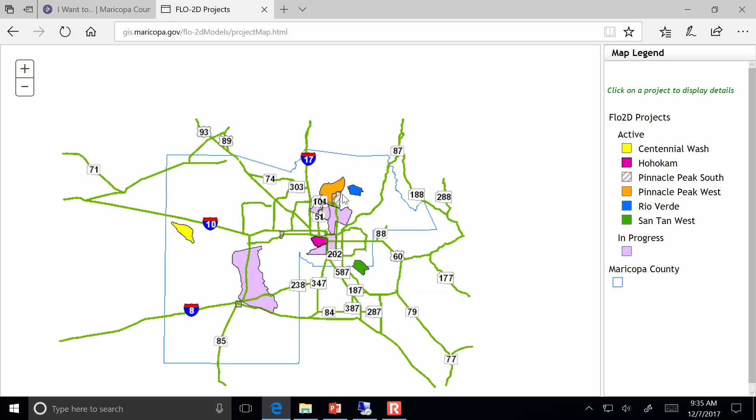But before we do that, just this morning I got the password so that we could take a look at the Flo2D results that Maricopa County has got on their website. And so let's launch the viewer, and it's pretty interesting. We'll be exploring this together. Since I just got the password about 30 minutes ago, I haven't had a chance to really get to the bottom of all the capabilities. And I saw it on Friday, so I've seen it.

But let's have a look. As I mentioned last time, one of the astonishing things that they do is they contract with surveyors who have drones, and they'll fly an area using LiDAR, which is a technology that can produce really high resolution elevation data, and they take their own aerial photography to have pictures in the background available.

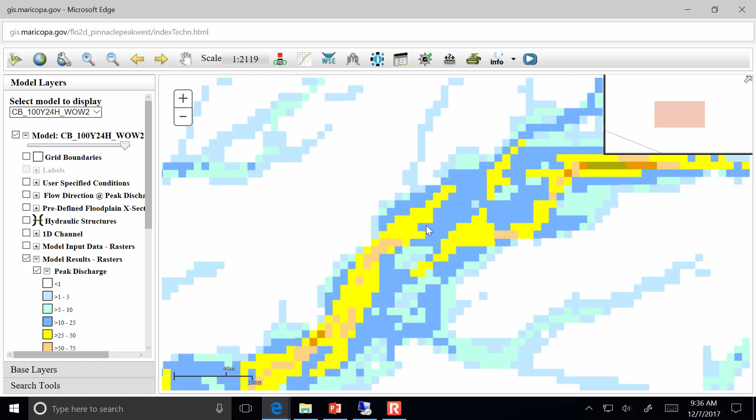So here right now it looks like we've got the 100-year 24-hour storm set, and if we zoom in on this area, you can see what the depths are going to be under the peak discharge. And so I imagine that as we zoom in, it's maybe going to improve the quality of that raster, and we might be able to turn on some base layers that include where the roads are, and we could switch on some of the images too, to help us see where the houses are. There we go.

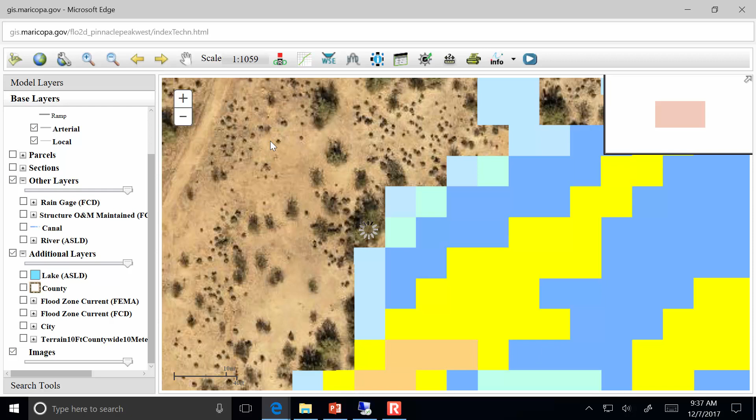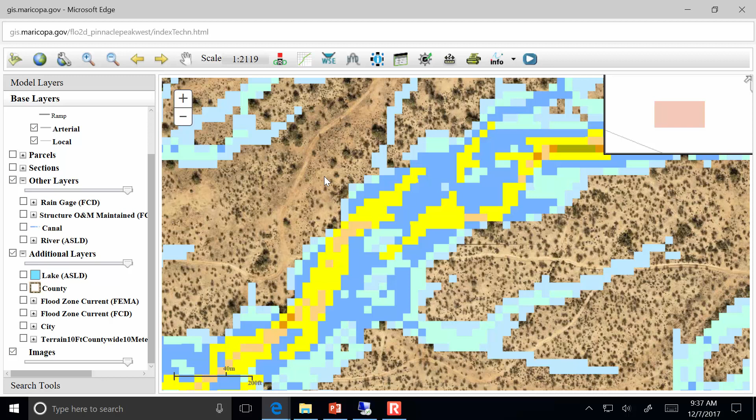All right, so this is really high resolution stuff. I mean, you're seeing where individual trees and bushes are, and so with this map you could find out if a tree that you're going to be planting is at risk of being washed away by the 100-year storm. And now obviously they're not doing it because they're worried about trees, they're worried about high-value real estate.

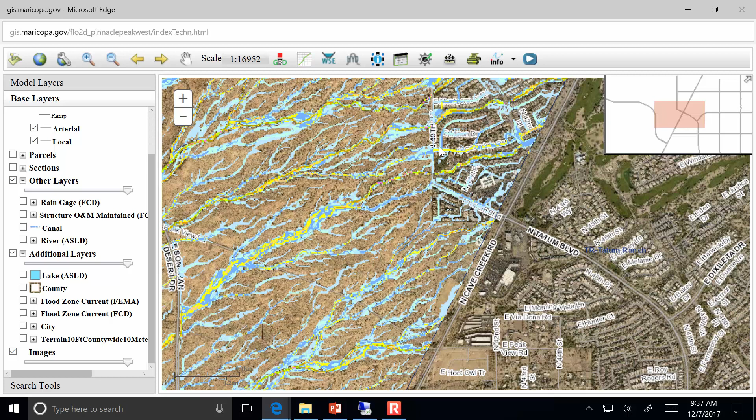And so here is a neighborhood, and the cool thing about this model, as it was described to me last weekend, is that you can do both rural areas and urban areas together, and there's kind of a seamless transition between the two. And the HEC1 models that we've been setting up using WMS, the strength of that is principally for rural areas or for undeveloped parts.

You can put together a HEC1 model for a developed area, but you'd need to have it be exclusively developed. Blending the two in one model, having both a developed portion and an undeveloped portion, really doesn't work together that great. And so what we did in this class for urban watersheds was I showed you very briefly how to use Bentley StormCAD.

And so remember, StormCAD is where you're setting up inlets and sizing the pipes using the rational method, and you defined catchments, and there's some more sophisticated functionality there where you can also create curb and gutter networks, so you could see how deep the water is in the curb alongside the road, and so it's got the open channel leading to the inlet and then water flowing through the pipe. But here, rather than having your urban being one model and your rural being another, it's seamlessly integrated together.

And so they have to sometimes go in and add break lines so that, maybe the elevation data would have had the flow going in a different direction, but they know that here's the road and the curbs are going to be directing the flow along that street towards certain inlets, or, as short as this road may be, it's possible that there isn't a separate storm sewer, but rather they just have the curbs that discharge directly to an existing gully, kind of an idea.

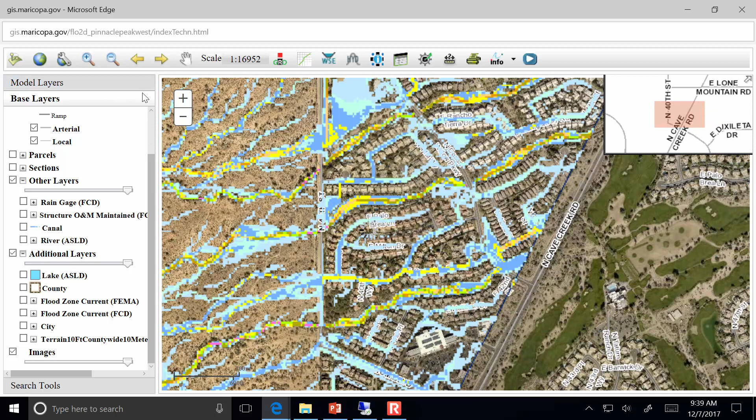And so I'm going to have to play with this more over the coming days rather than grade your exams and all that sort of thing.

But we can switch it over to, I guess it's mostly the 100-year model. I thought that they had other return period storms besides that, but that's probably the sort of thing that I have to check. Okay, so this is how transparent it is, in case you don't want it to overtake some of the other things you're looking at.

And the images can also be made transparent. Pretty cool. So this is separate from the FEMA 100-year flood maps. You know, the 100-year flood maps that FEMA does are just sort of you're in or you're out of the floodplain. This is showing you precisely where the water's going to be and what the depth of the water is going to be. So FEMA is kind of a binary thing: floodplain, no floodplain.

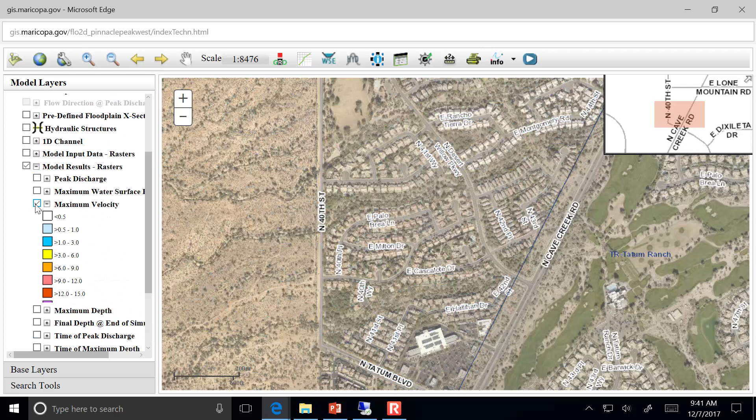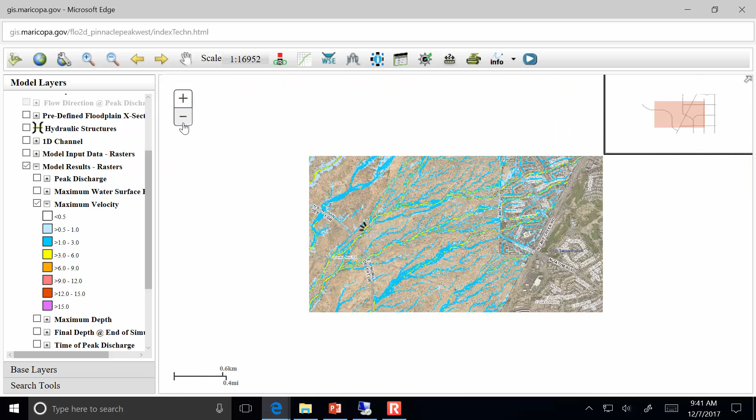Let's switch on some of this other stuff to see what we can see. Velocities, so that you have an idea of what the scour might be. So it looks like relatively low velocities through this neighborhood, and as we get further into the network where you have a lot more accumulation, then of course the scour velocities are going to increase, and that's also taking into account the slope of the channel. So I guess the warmer colors are indicating faster moving flow, and so this region with the faster velocities is going to have some scour potential.

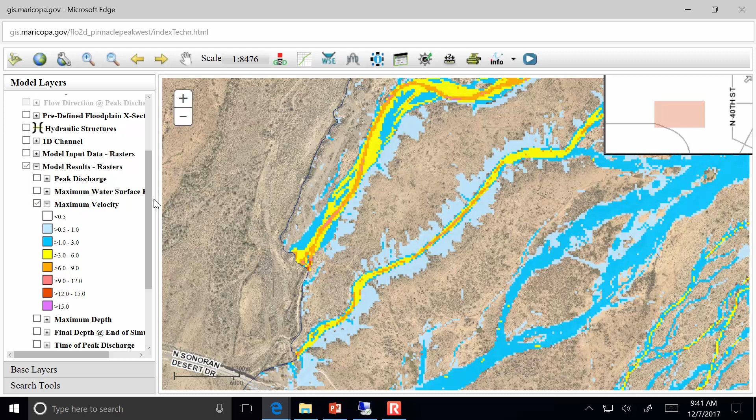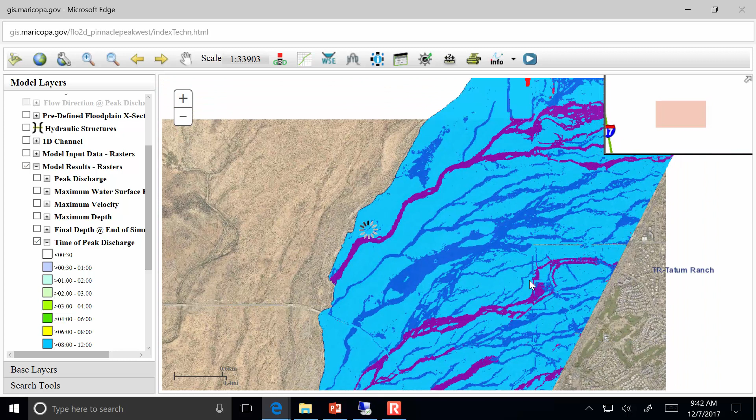And so if you were putting in a culvert, or if you're building a bridge and you're thinking about the foundation of the bridge structure, then scour is going to be a risk at these locations where there's a higher maximum velocity. So that's pretty interesting stuff. So I'm just exploring this for the first time, and time of peak discharge, I think, is pretty interesting, because I guess this time of peak discharge is telling you how long you've got until the flow arrives at a certain location.

And that's significant because they have a couple of locations where every year they're putting in 2 more signs that can be remotely activated, or in some cases it detects flow in a stream, because they don't have culverts and bridges over every crossing. Sometimes the road just goes down and then it'll be momentarily flooded during a peak event and people just have to not drive across that road. But if it's at night, you can't really see how deep the water is, and sometimes people aren't paying attention, so they have flashing signals.

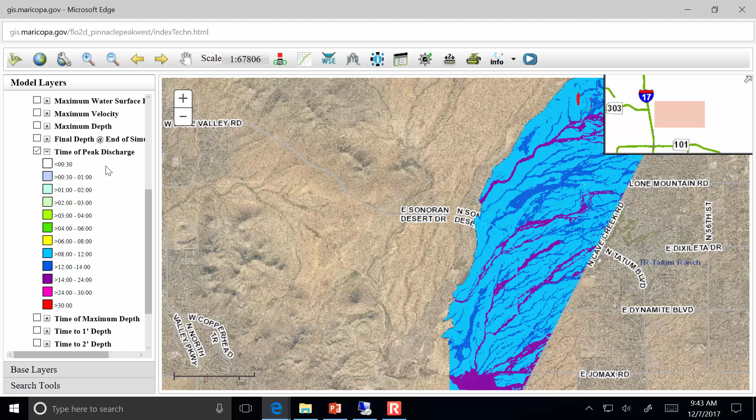And so this time of peak discharge is a useful bit of information, because it tells you how much lead time you've got from when it begins to rain to when that flow may be going through a crossing, and how reactive you've got to be before you activate a signal and the flow actually could be there. This model is amazing, and it's just light years beyond the capacities of HEC 1, so I think I've got my work cut out for me. I need to start adapting these same kind of models for West Virginia and learn more about Flo2D. It's not anything that I've used before, but they convinced me it's the wave of the future, and it's really a cool resource that they've put online.

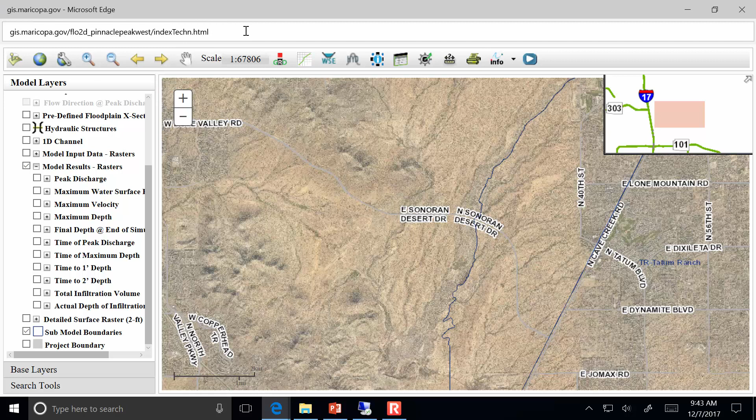If any of you are interested in having access to the system, just to show to other people or maybe to look for yourself, then I can put you in touch with the people who can generate the passwords, because each user is supposed to have their own password for accessing the site.

Well, high-resolution elevation mapping is one of the most important things. And then another thing that they showed me while I was there is that they have really detailed soil information as well. A really clear understanding of the soil that's in the watershed, particularly because in these areas they lose a lot of water during a storm. It's called transmission losses, where the water is infiltrating down into the channel. I think the transmission losses are probably less of an issue here in West Virginia, but the point is that you need high-resolution elevation data, high-resolution soil type data.

And I don't know that we have that same really detailed understanding of the soil properties on a wide-scale basis like they do across their county. I mean, they've commissioned some really exhaustive studies, and you think sand is sand, gravel is gravel, but it turns out that it's a lot more sophisticated than that.

But I mean, there's a lot I still need to learn, so I would imagine that next year's version of hydrology is going to hopefully include a little bit of Flo2D, but I still have to iron out all the licensing issues and see if it's the sort of thing where in a lecture or two you can put something together meaningfully.

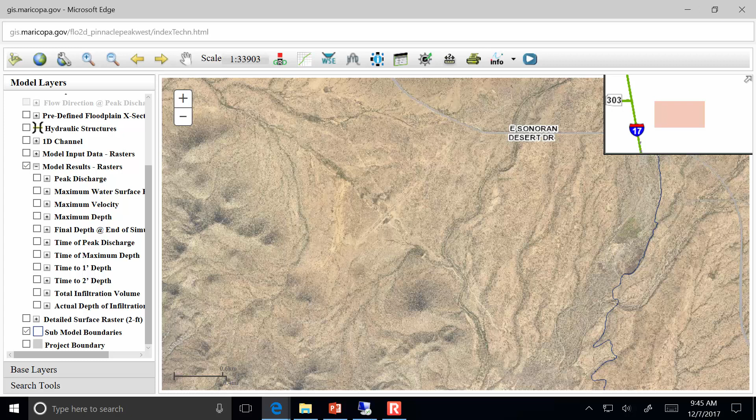All right, so the bulk of what we're going to be doing today is talking about groundwater. Groundwater hydrology includes how much water there is under the earth, different aspects of its quality, and that can include contamination from surface sources, like unintentional spills, or through the 40s and 50s, unfortunately, there were a lot of places where hazardous chemicals were land applied, and things like dry cleaning fluid or explosive residues were just dumped into trenches, and then the trenches were covered with soil, and over time that contamination seeped down into the water.

So that's one aspect of quality, but another one that's really important is the infiltration of saline groundwater into previously freshwater aquifers. And that happens a lot in coastal areas and in inland areas as well, where there are brackish waters that, because you're pumping fresh water, start to intrude in areas that previously were freshwater. Trying to figure out where the water is and how it moves through the soil. So all of these concerns are addressed by the field of groundwater hydrology.

And a big component of being able to predict these things is putting together models of where the water is and how it moves. And so just like there's WMS for surface water hydrology, the Aquaveo people put together a program called GMS that's for groundwater flow. And it uses some of the principles we're going to be talking about today.

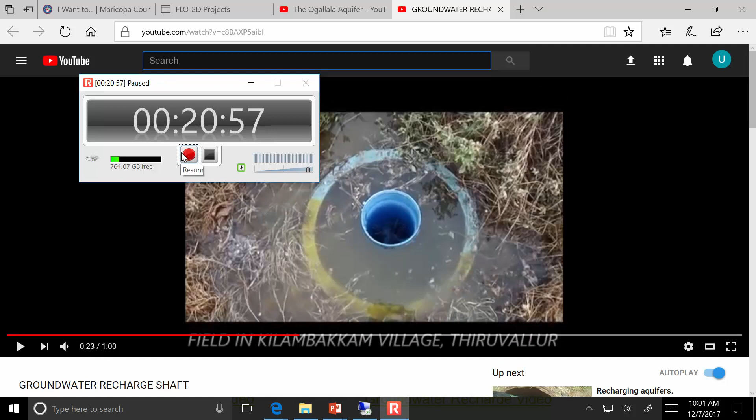I don't know how they expect us to study with the Christmas carols chiming in the background. It's a little distracting, right?

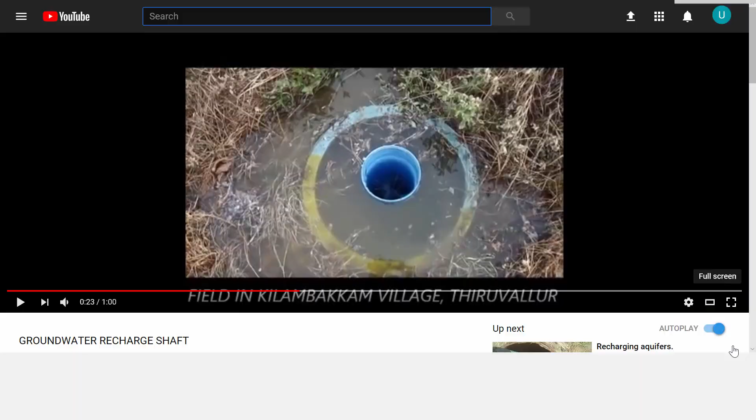All right, well, let's break this down. Someone drilled a hole in a field, and they put a pipe, like a well casing, and water is trickling into the hole. So did you understand what's the point of this hole that they drilled? What are they trying to encourage? Groundwater infiltration. They're trying to take the water from this pond and get it down underground where actually it could be stored. Because when it's in this pond, remember, it's subject to evaporation.

This is a prime breeding ground for mosquitoes. And India is now a Zika country, especially in the south. Tamil Nadu is in the south of India. And so this is a health risk, and it's a lost resource if that water evaporates. And so just drilling a hole and encouraging the runoff from that field to go down underground is a great idea.

And part of the purpose of this casing is, I would imagine, we can't see, but I would imagine it's slotted, it's like a mesh at the bottom to try and filter out any rocks or contamination that maybe would get down into and plug the holes as the water gets in.

So this may require some occasional maintenance. Another thing that's relevant about this is in this field, the runoff from the surrounding land is all going to this pool area here, and it's going to bring fine sediments with it. And so those fine sediments are going to be clogging the soil pores at the surface. And so there probably isn't good surface infiltration down into the ground because over the long term, the sediments have clogged that.

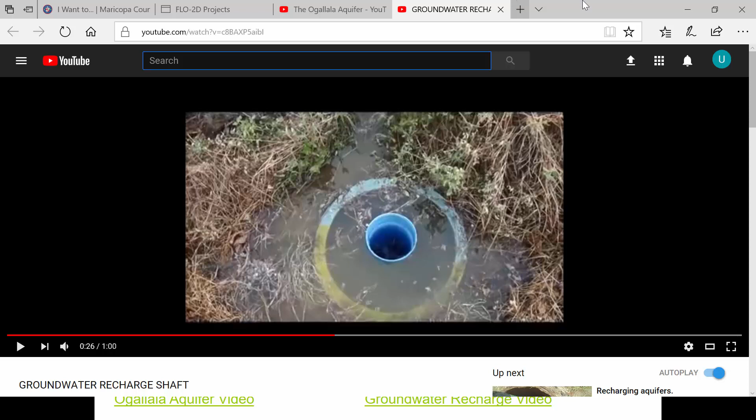And so hopefully, if this is a stratified aquifer, meaning that there are different depths at which water exists, and maybe they're confined by layers of really low hydraulic conductivity, maybe the drinking water well goes down 100 meters, and this is just going to more of a surface aquifer, and they're separated by a couple of layers of clay that would be reducing the rate of movement until bacteria in the soil could remove any microbial contamination, and hopefully there's no chemical pollution, although in Tamil Nadu there probably is a lot of pesticide use there.

All right, so those were interesting videos, and they kind of set the stage for part of what we're going to be talking about today. Here's a cross-sectional view, and this is what I was just talking about, where you can have multiple aquifer layers, and so this kind of helps us to understand some of the important terminology. An aquifer is just where the voids are saturated with water. And so there can be water in the soil above the water table in the form of soil moisture. But when all of the voids are completely saturated with water, what that means is that we could extract the water out.

Now, an aquiclude is where water is present but can't be easily extracted because of a low hydraulic conductivity. And so this cross-sectional impervious layer is meant to represent like a clay formation. And the confined aquifer has a confining layer above and below it. And the reason why it's pressurized, you can see from this well casing where the water is actually coming out without even having any kind of a pump. So that's showing that at C, the aquifer is pressurized, is because the water table is perched.

If you look over here, we've got rain onto a hillside that's elevated, and there's enough of the water over here that this is the free surface of water. Here's the water table, and we're going down. The pressure is increasing to the point of where through the soil there are some losses in pressure. You can see here the water table height is higher than it is there. And that tells us that the movement of the water is going to be from where the water is high to where the water is low. So it's moving from A towards B, towards C.

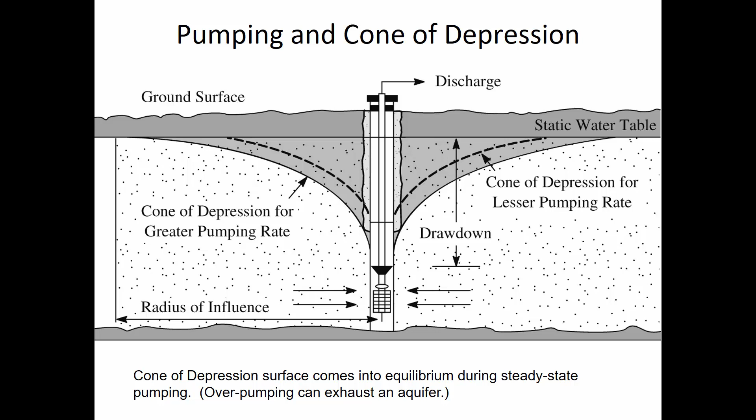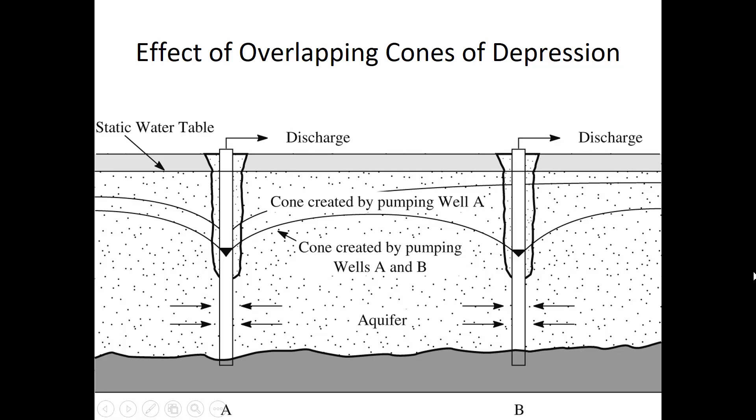All right, so a fully penetrating well would be a well where the casing is all the way through the depth of the aquifer. Let's go back to a picture really quickly. None of these wells are fully penetrating through the confined aquifer. If they were fully penetrating, then the well casing would go all the way down to the bottom, and they would be screened through the entire depth of the aquifer, meaning that water doesn't have to flow through just some of the depth, but can flow through all of the depth towards that central location.

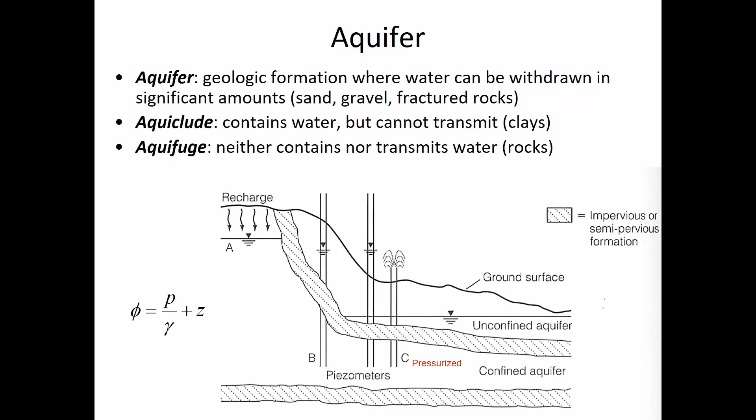So if we go back now to the terminology, fully penetrating means all the way to the bottom. Screen depth: the screen is these slots in the drain, or sometimes a physical wire mesh, to try and keep the soil and rocks from going into the central location, where really all you want is the water. And the well radius is the radius of the physical pipe itself. That's one of the parameters that we're going to put into the formulas that tell us how much water you can get out of a well for a certain drawdown.

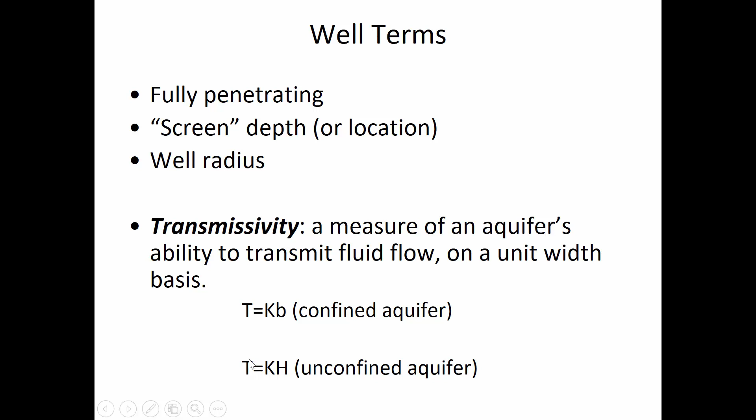Now you all know about hydraulic conductivity. There's a closely related term that takes into account how thick the aquifer is, and that's transmissivity. For a confined aquifer, we would have the height of the aquifer B multiplied by the hydraulic conductivity to get the transmissivity. But in an unconfined aquifer, we'd just use H, which is the depth of the water from the bottom of the confining layer up to the water height itself. So H is basically just how deep the water is inside the unconfined aquifer.

Okay, so hydraulic conductivity has units of length per time, whether it's centimeters per second or meters per day. It's a measurement of how easily water flows through the soil, and it's affected not only by the void size, but also by how attracted the material is to water. Part of the reason why clay has such a low hydraulic conductivity is because of the negative charge of clay particles. So there's an attraction between the negative charge on the clay particles and the positive charge that exists in a hydrogen.

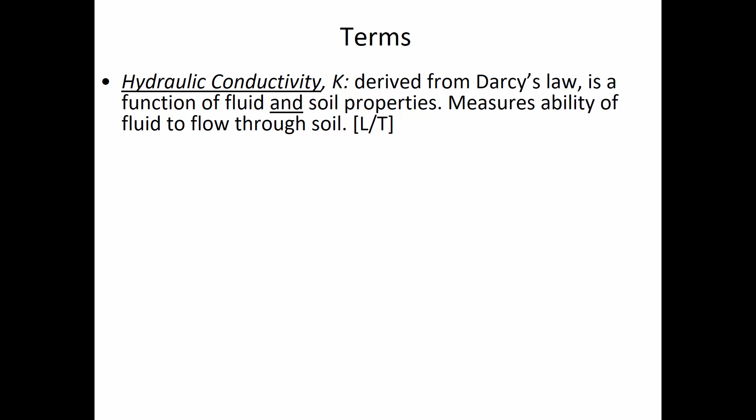In a water molecule, H2O, we know that the electrons go towards the oxygen, and so it's a polar water molecule, and that sort of accounts for the slow movement of water through the clay soil. Aquifer thickness, B.

Transmissivity. Piezometric head is pressure divided by gamma plus elevation. And piezometric head is going to tell us how much energy is available to drive the water towards the well casing.

And then one last term that we haven't talked about today, but we have in the past, is the effective porosity. Of course, porosity is just a measure of the voids in a soil matrix relative to the overall volume. But some of those voids may not be interconnected, and so the effective porosity takes that into account, as well as some of the void is full of water that can't actually be removed because it's so closely bonded to the surface of the soil grains. And so effective porosity is accounting for both of those factors.

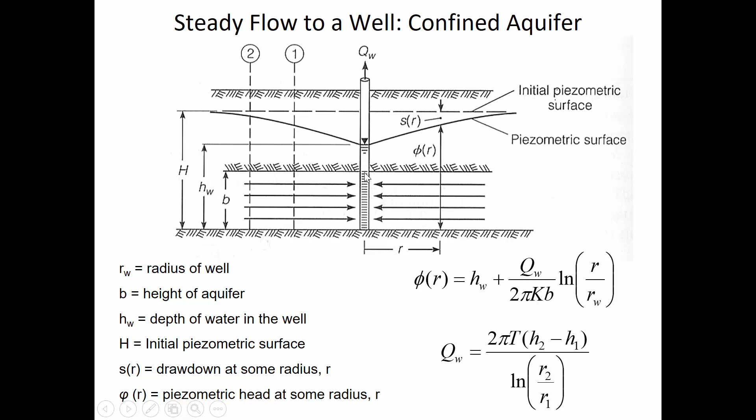For a confined aquifer, this is how it looks in the supplied reference manual for the FE exam. These are the equations that they've provided, and they call it the Theim equation. I guess I after E would be pronounced "theem" equation.

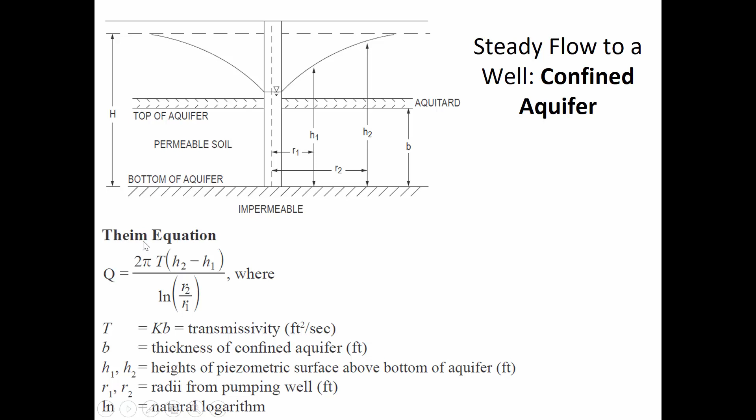Let's get some practice with that, just to dust out the cobwebs and get some practice crunching the numbers here. We've got a hydraulic conductivity of 20 meters per day. The thickness B of the aquifer is 6.6, and the initial piezometric surface is 14.53 meters above the lower confining layer. So that means that before pumping, capital H is 14.53 meters. So we want to know what's the Q that's going to cause the piezometric surface to be at 13.85. So you're going to have to use that as the h1 value.

And one thing I should point out is that we've been talking about the cone of depression, and a related term to cone of depression is drawdown. Drawdown is the distance between where the water is when pumping doesn't occur and where the water level is when pumping is going on. And so drawdown is the difference between those two.

Sometimes the distractors in the FE exam are trying to trick you into substituting drawdowns for the actual H values, which are supposed to go into the equation. So don't fall into the trap. Know the difference between the piezometric depth and the drawdown.

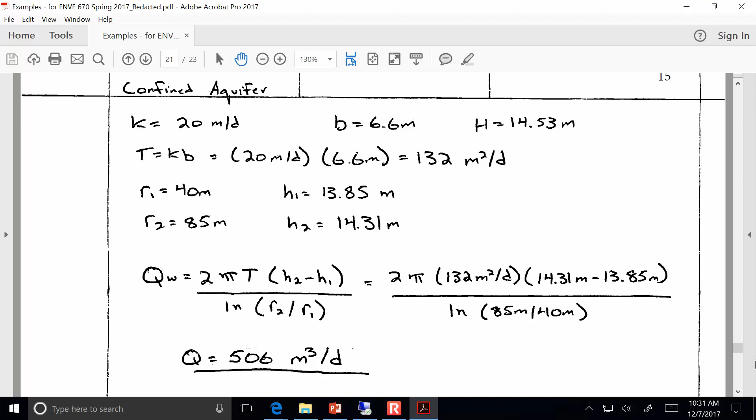Okay, for the second part, we want to find out what's the depth at the well under these conditions. So essentially, we're just going to be solving for H1 given an R1 of 0.25. The same flow rate, the same hydraulic conductivity. You need to pick a location too. So are you going to use the radius out to 85 meters or the 40-meter location?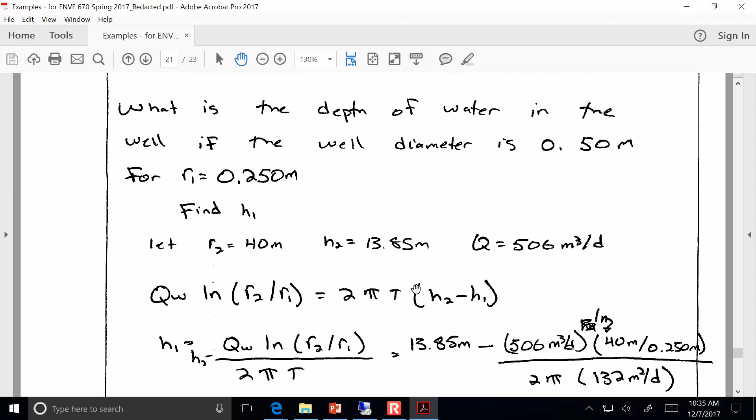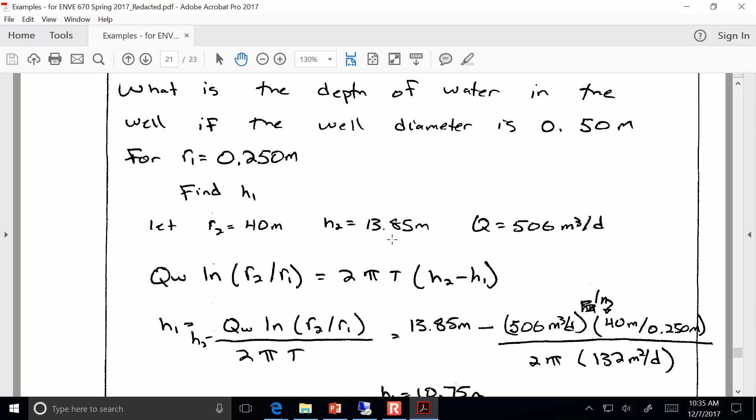In my solution, what I did was I said, okay, so R1 is going to be 0.25 because that's at the well itself. And I let the location 2 be the closer monitoring well, where we're keeping track of the water elevation 40 meters from our extraction well. And the height of the water at that monitoring well 40 meters away is 13.85 meters. And so for that same flow rate then, it tells us the depth at the well itself should be 10.75 meters. Anybody else get that same water depth?

All right, good. These problems are hard to write because you can create problems like this where the output number is impossible. So writing well problems is sometimes an iterative process to make sure that it works out and then it's not negative flow rates or negative water depths and things like that.

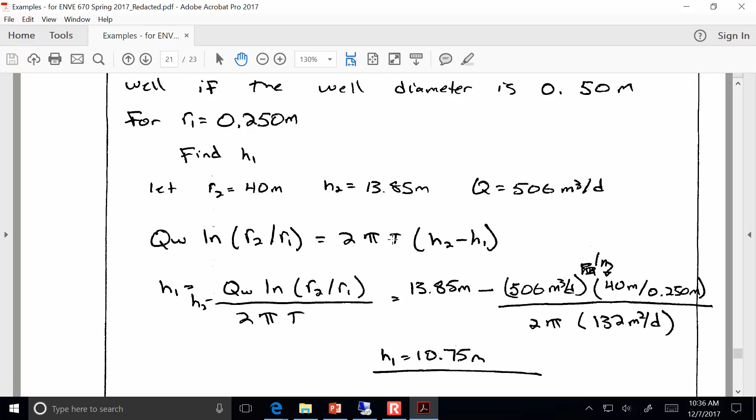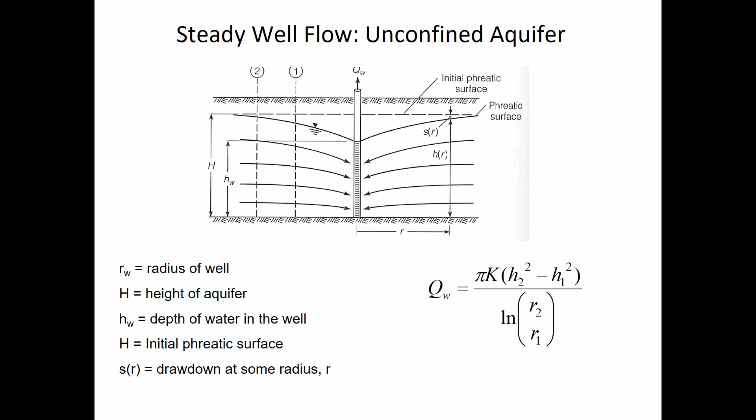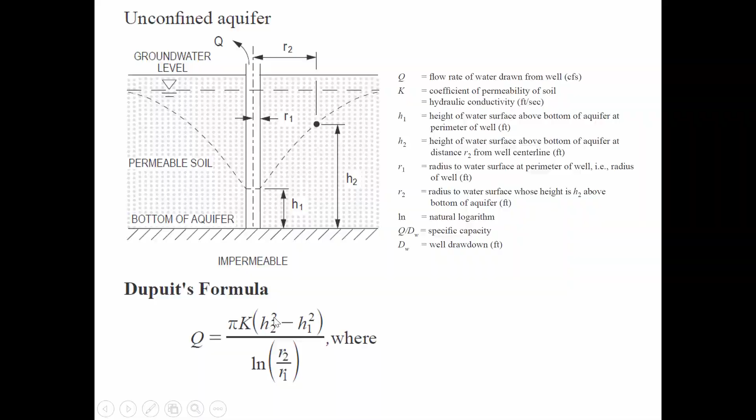All right, well, so that is a confined aquifer, which is the easy case. Things are just a little bit different for an unconfined aquifer. You have to square essentially the depth of water rather than it was just the depth of water in the case of a confined aquifer. Some texts, instead of squaring it, have you calculate like a modified or an effective height. If we look here in the FE reference manual, Dupuit's formula is squaring it. That's how they have it in the reference manual. And so let's take that formula and try it out here.

We have an unconfined aquifer where we are given the flow rate, 0.4 cubic meters per second is extracted from this unconfined aquifer. And the saturated thickness is 24 meters. So that's this depth H. That's how high the water level is before there's pumping. So now this is expressing the heights of the water in terms of drawdown. So 50 meters away, there's a meter of drawdown, which means then that the h is going to be 23 meters at that location. And 100 meters away, the drawdown is 0.5 meters. So you can use that, first of all, to calculate the hydraulic conductivity, and then in part B, I'd like you to calculate the drawdown 5 meters from the well.

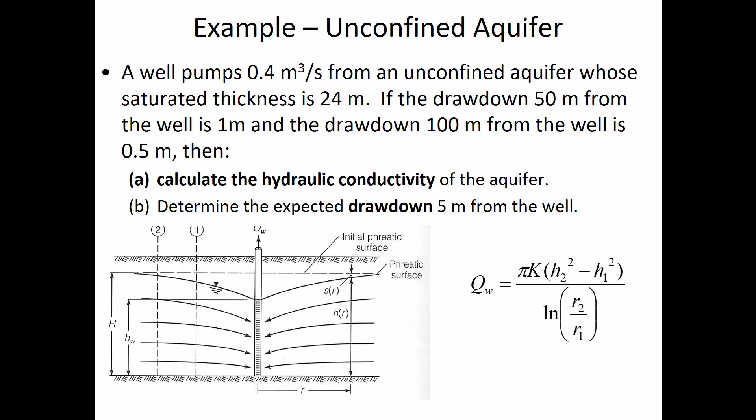Interpreting the problem statement is more than half the battle on these. I mean, just trying to figure out what it's asking and not confusing drawdown with head and that sort of thing. Okay, so this is showing the first one.

So we can rearrange the equation for k and making sure that the units are consistent with what we ultimately want. You know, if the k value is going to be in terms of meters per second, then we'd want to take the flow rate, which maybe would be given in cubic meters per day, and convert it. But in this case, we also are calculating the h values from the given drawdowns. Okay, so 3.8 times 10 to the minus 3 meters per second is the hydraulic conductivity of that material. Has anybody already calculated the drawdown? Okay, let's take a look at that part too.